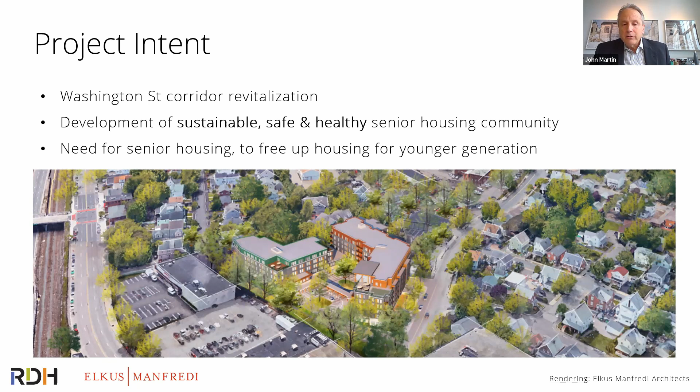And the emphasis from the very outset, from the programming of the building to the food that's served in the dining rooms, to the way the building is constructed is to really place an emphasis on doing a sustainable, a safe, and healthy project to extend the lives and the quality of life for the people who live here and give them the best possible outcome. And as the bullet point notes, to free up housing, single-family homes in Newton and the surrounding communities for younger generations with families. So in that sense, Passive House worked right in.

Specifically, the program is a 6-story building. It's 2 wings, as you saw. The hockey-shaped wing, that I said that for your benefit, Maureen. The hockey stick-shaped wing is the independent living, and the bottom left wing is assisted living and memory care. There is a single level of underground parking that takes up pretty much the entire footprint of the site, and altogether it's about 224,000 square feet.

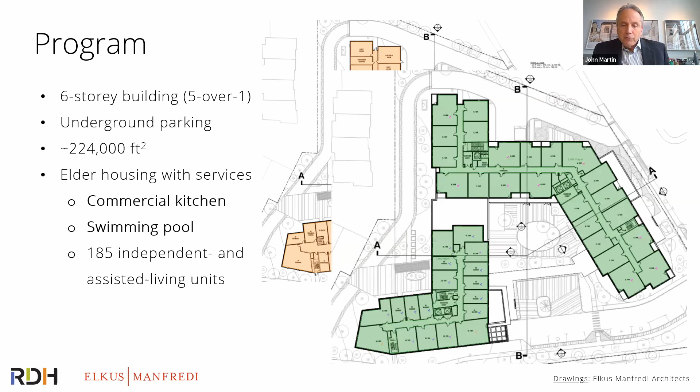This is the upper floor plans. You see where the 2 wings, they're joined on the first floor, but they separate themselves on the second floor. Again, the upper right is all of the independent living apartments, ranging from small 1-bedrooms to even a couple of large 3-bedrooms. And then the wing down to the left is the smaller assisted living units and memory care units on the second floor. Altogether, 185 residences around this central court.

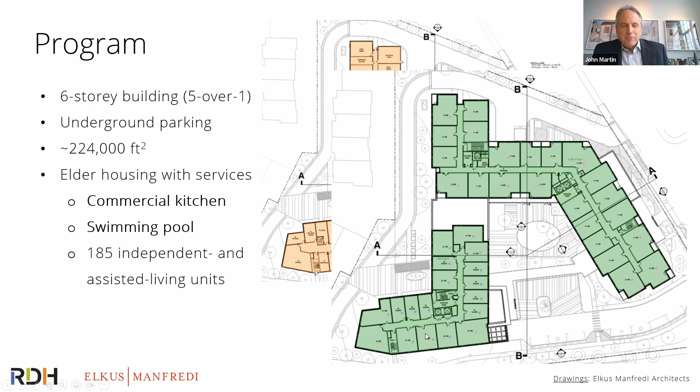Yes, so before diving into the project detail, as Ken mentioned, we're going to touch on quickly what the regulation landscape is in Massachusetts for anybody not quite familiar with it. So in Massachusetts, the energy code is changing really fast. And actually, as of January 1st of this year, this energy code has been updated.

You have a base one, which is very barely used. As you can see, the stretch code is where most municipalities are sitting. And then with that code update, you now have the specialized opt-in stretch code. What does that mean? It means that you have 2 different paths of compliance depending on the path the municipality is choosing for you. As you can see, the vast majority of municipalities are still with the stretch code,

and the first thing to flag is that we are moving to absolute metrics. You can see that they are setting for us thermal energy demand intensities, what we call the TEDI, that space heating demand that we keep talking about. And also that they are significantly tightening, because some of these targets are actually tighter than Passive House. And we already know Passive House is already quite stringent as a starting point. This is to the left.

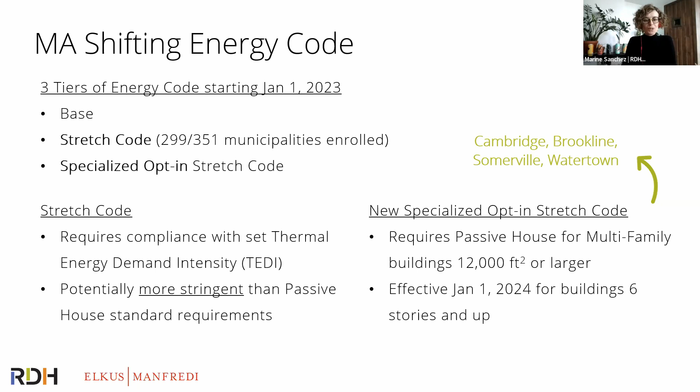What does that specialized opt-in stretch code mean? Again, just to give you a little visual before zooming back onto the project. What you're seeing on the screen is to the left, the residential portion, in blue, the commercial portion. And what you're seeing is that as soon as you're with multifamily residential, left side of the screen, Passive House will be a compliance path no matter what characteristics your building has, right?

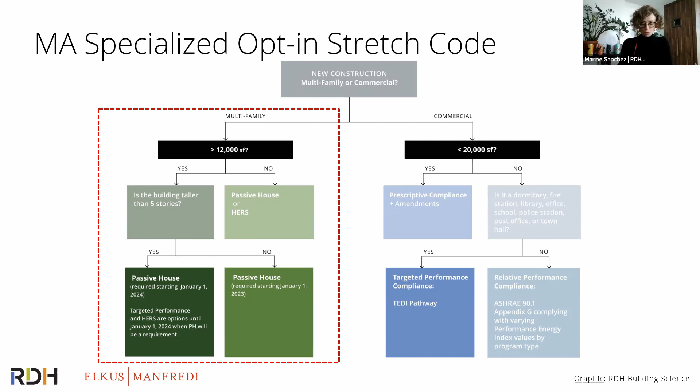And one more thing for the town of Newton, where this project is based, where at the moment every single commercial new build has to be all electric. That is because of their sustainability ordinance, but that requirement might be extended to all new construction as well as major renovations once that electrification home rule passes. Newton is pushing to be part of the 10 municipalities that are undergoing that pilot project, so you can see the path in which we're going. It's getting extremely clear, and it's moving extremely fast.

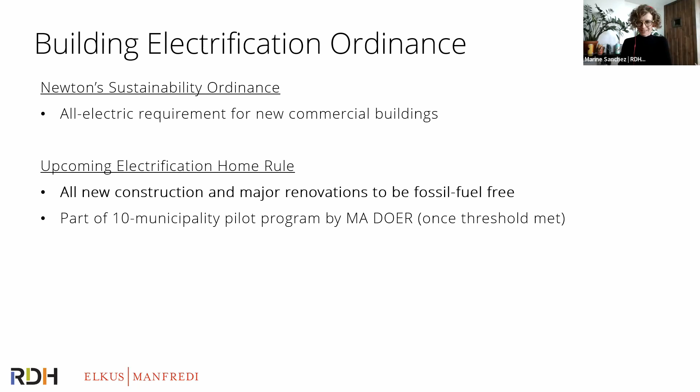So going back to the baseline for a second and looking at our exact project. With these changing and tightening requirements, our baseline is not the one we're used to having. So we're going to look at that over the next section. What we were used to having was that type of multifamily residential project, in which the domestic hot water is typically based on gas, right? And that is a typology that we will be working with on this project, but we are adding additional challenging typologies, and that's going to skew a little bit our project performance.

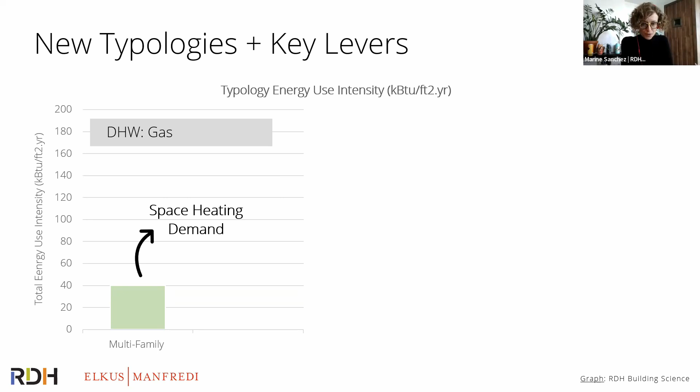So what am I talking about? Yes, we still have the residential portion, but we are adding 3 additional components, and you're going to see that the color coding that we have for the presentation is maintained, to help you visually with the different zones that we're working with.

We have that level 1 non-residential podium, we do have the kitchen, and we have the pool. So we are working with high energy consumers in these 2 typologies, which are increasing the EUI, the energy use intensity, which is the total amount of energy consumption the building is using. So we're adding these different and more challenging typologies, while also shifting the domestic hot water from gas to electricity based. So this is changing quite a lot of things.

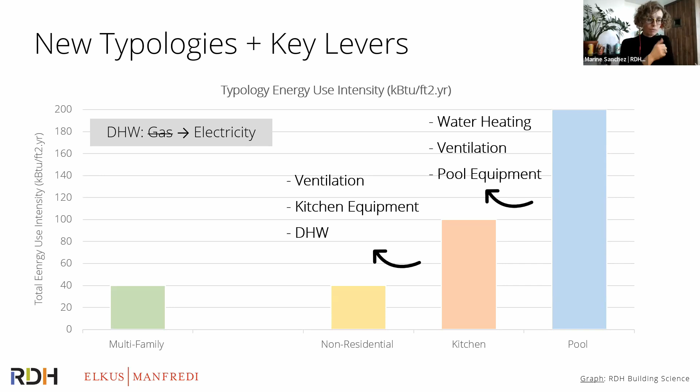So for us to understand better, like you can see on the graph, we've highlighted the key levers for each typology, but for us to be able to make decisions before schematic design, right? Because I'm sharing with you some of the work that has been done during the concept phase. We've decided to use a technical comparison table as our tool for decision making, to understand if we were going to follow these targets, and if so, what it meant.

So this is the quick overview of the 3 typologies in terms of, to the left, sorry, I've lost my mouse, bear with me. Here we go. To the left, what the all electric baseline now means, and to the right, what does it mean to increase our performance all the way to passive house standard. And what you can see is, yes, there are a few differences. You don't have to read through everything. We've highlighted them for you.

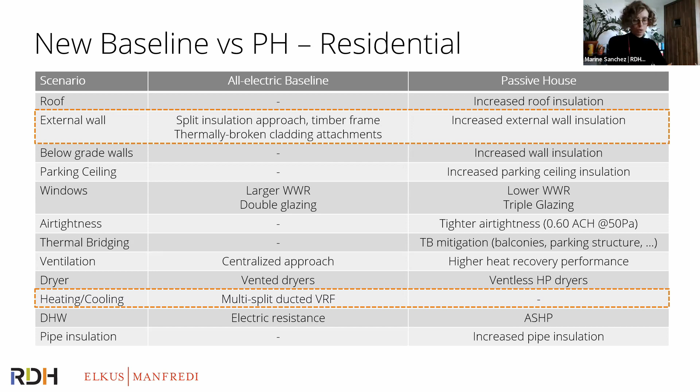The first thing I want to highlight is in orange, this is what, funnily enough, we realized there wasn't such a big difference in specification. So if I go down to heating and cooling, you can see that the system stays identical. We might even work with a smaller system, so potentially slightly cheaper. And in terms of what is required on particularly your external walls, yes, we do have a little bit of additional insulation, but as the code requires a continuous layer of insulation, we're not fundamentally changing our approach. So this is a positive note to see that these upgrades were not significant in the grand scheme of things.

However, the significant ones are highlighted in red, and clearly we're looking at refined window to wall ratio, improved window frame and glazing performance. John will touch on that a little bit later, and a big shift on the domestic hot water side, which is a change in design strategy, shifting from an electric resistance, so direct electric for domestic hot water, to an air source heat pump approach.

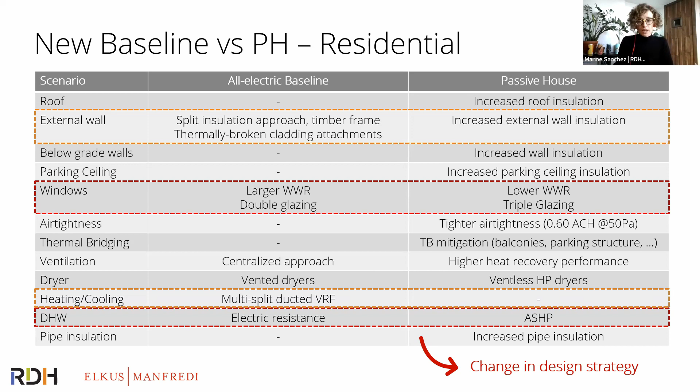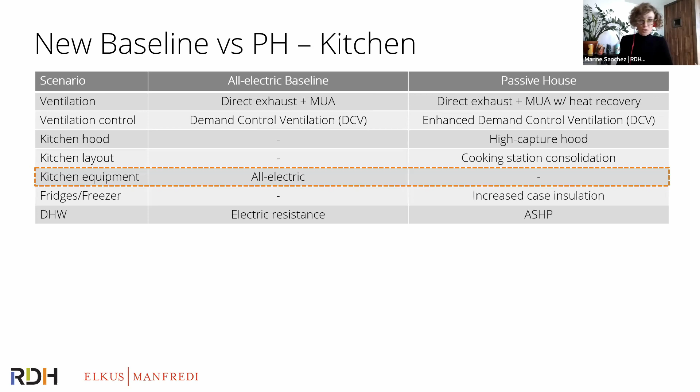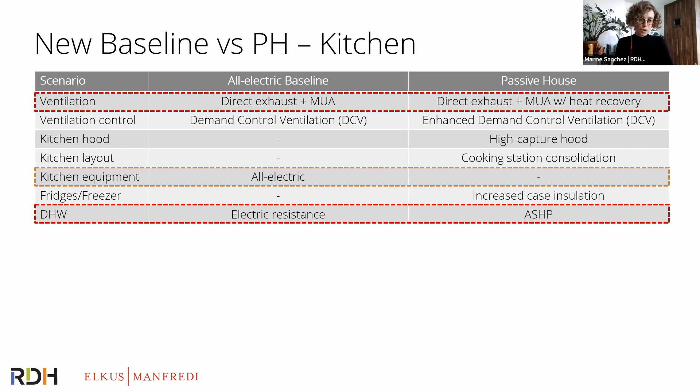We've done a similar approach for the kitchen to again understand what we were facing. And yes, there are a few changes. Worth noting that the kitchen equipment is normally a big change from what we're used to doing, but now that we have an all-electric baseline, you can see that there's no significant changes in equipment anymore from our baseline to the passive house case. However, we do have a few key items, mainly looking at heat recovery into the ventilation portion of the kitchen, as well as that domestic hot water production. You're starting to see the theme there.

Finally, for the pool, same thing again. We've looked at that difference between what we consider an all-electric baseline to what passive house would ask us to do. And again, the key design decisions that we had to make really early are mainly around the ventilation approach, which is a little bit more delicate with the passive house approach, similar to the kitchen, as well as the domestic hot water. So again, you can see that common theme shared across all the zones.

So this was more or less a high-level summary that we had to do before even getting any energy models, let alone detailed drawings, to guide the client into their decision making, right? What are the targets that we're aiming to have and trying to maintain for the project? And what does that mean for our design? And what does that mean for our cost?

With that in mind, and with these tools at their disposal, they were able to do a little bit more work, which we'll share in the last section around the business case. But in the next two sections, John and I will go through the next step of the design regarding the schematic design and the progress that we've made, and the integrated approach that we have had to use to really deliver that high level of performance on that project.

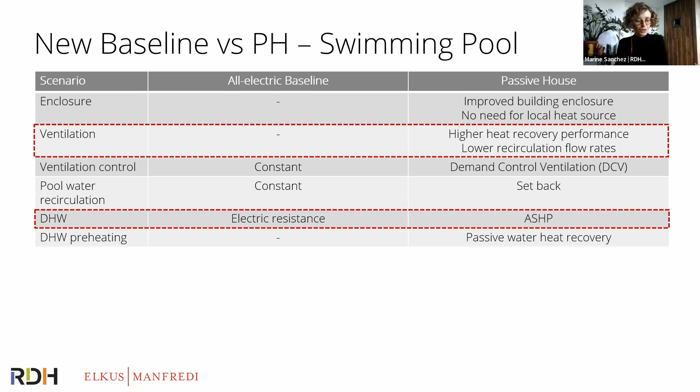So John, back to you with the enclosure. Yeah, thank you, Marine. And I'm seeing questions come in the chat. I know we'll have opportunity later, but one caught my eye, and that was, who was the developer? We're working with Mark Development here in Newton, and what was their motivation for doing this? They do clearly see it as they want to be market leaders. And so they do clearly see offering a passive house certified project as a marketing kind of strategy.

But I think what really drove them was just a social consciousness. The same thing that drives most of us is to try to be good stewards of the environment. So I wanted to put that in there for them, as well as a very enlightened developer that we're working with here.

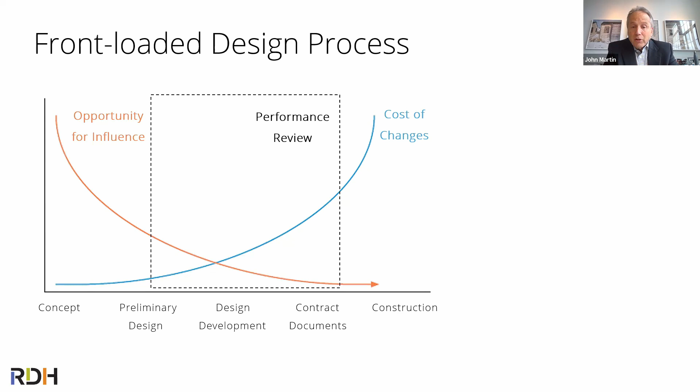So in terms of the enclosure, we'll show you a quick graph that you all know very well, which is the opportunity to influence this design is the greatest at the very beginning. And usually in our profession of architecture and engineering, the performance review has come sometime in design development or even construction documents. By really committing to passive house from the start of this, we're able to now shift all of these reviews and make these decisions much earlier in the design cycle. So if you go to the next slide, I think this little square moves over to the left.

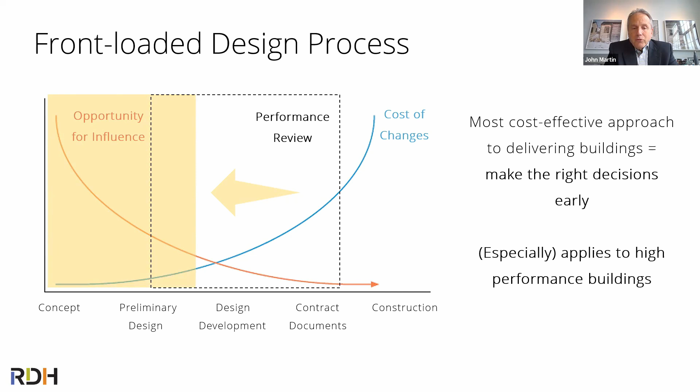And so right now, we're going to talk about cost in a moment, but we just got our schematic design price estimate in, and we have been able to develop a lot more specific case scenarios for the building enclosure than a cost estimator would usually see at this very early stage, which is going to help us at the end to really make the most of our building envelope. So let's go forward, Marine.

In terms of the building enclosure itself, the first step is just to determine the boundary. And clearly this would have been a much easier lift had we just said we're going to concentrate on floors 2 through 6 and only the residential. But here, largely because of Green Newton, the organization in Newton that advocates for highly sustainable design, and the developer's commitment, we are doing the whole building, and that made it a lot more complex.

We've worked hard to eliminate thermal bridging in the structure, and we've worked hard to eliminate thermal bridging in the fenestration. Marine already alluded to the window wall ratio. I'll say a little bit more about that later. And then to just develop clear field effective R values for use in the energy models. If you go to the next,

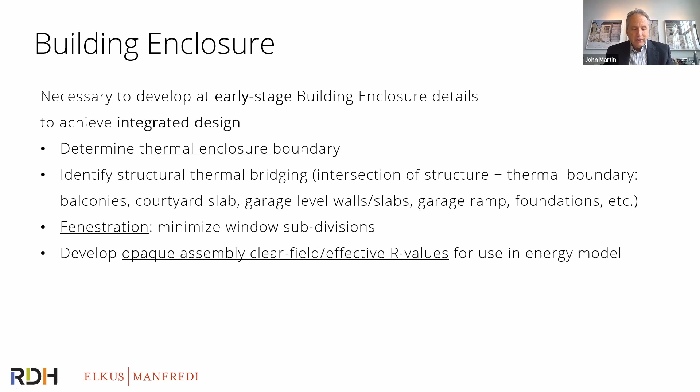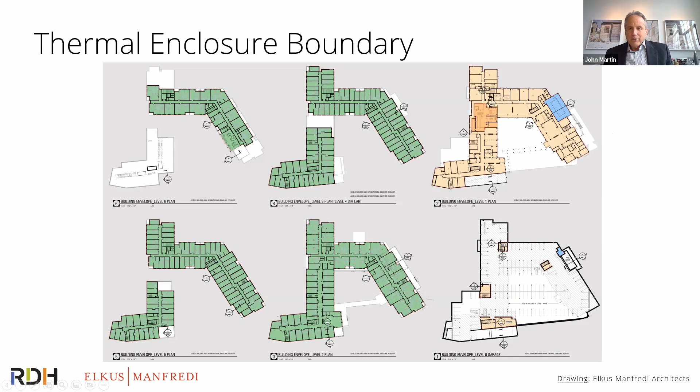We did not let passive house considerations drive the form or materials of the design. We approached this design much as we would any other project, letting the program and the functional relationships and the quality of the spaces inside determine the massing of the building. And it created some interesting things.

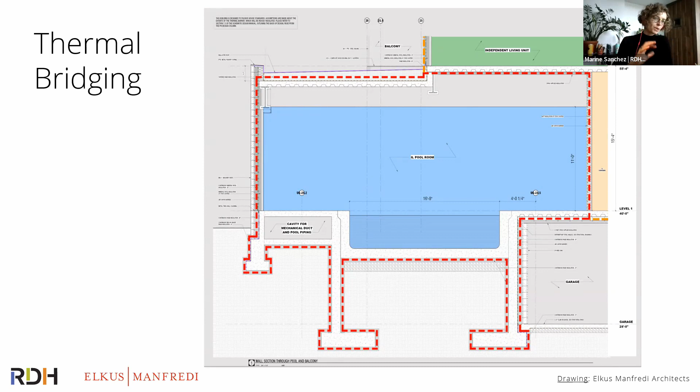You can see that both the orange and red lines define our thermal enclosure, which John just talked about, but I just want to take a second to highlight that the red line, which is around the pool, is also needed from a thermal standpoint, as well as controlling relative humidity levels. It's important to note that even if the pool is within the thermal enclosure, we have different temperature set points, much higher than the rest of the building. So we're going to have heat losses to the rest of the building, as well as higher RH. So it almost requires its own zone subdivision, hence that red line on the drawing.

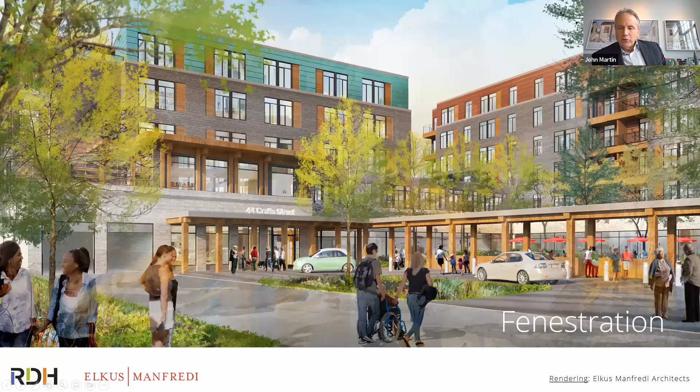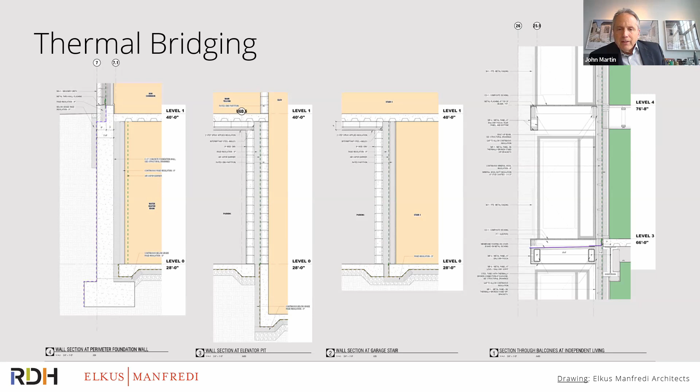If you go to the next, yes, go ahead. Sorry, John. Final thing, I was just going to say, just a quick shout out to the delightful drawings from Elkus Manfredi here. I don't know if you can see, but all the orange to the left are heated space, be it at level 1 or the parkade, and the gray is the parking garage. And you can see, it's quite small, we haven't highlighted it, but you see a continuous layer of insulation wrapping underneath the footing to go back up. So just, you know, music to my ears. I just wanted to point it out because we don't always get it.

So Marine says it's music to her ears. Actually, she made us do it. So true. But you're not supposed to say that, John.

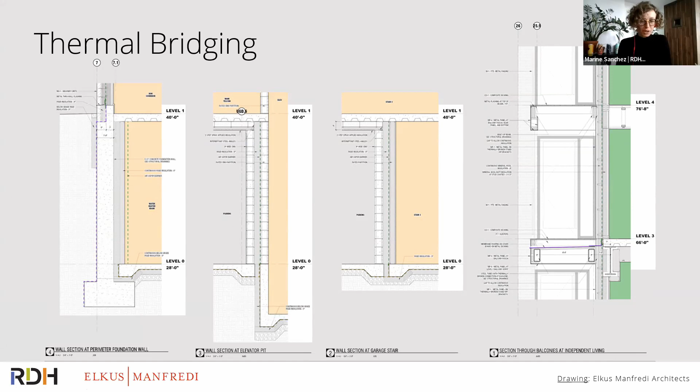It really has been a collaborative partnership, and it's been a great back and forth between our two firms. Just a quick word about fenestration. When Marine starts talking about reducing the window wall ratio, that's profanity to us. I'm showing you the entry to the assisted living and the memory care on second floor, assisted living on third, which are typically very small units, almost like student housing type units. And it's our belief that the smaller the unit, the bigger the window needs to be, to let in daylight, to create views.

And so we have worked hard to minimize the divisions of the glass, since the mullion is the point that creates the thermal bridge. We're using, as Marine talked about, triple glazed windows. We're specifying at this initial stage an Intus fiberglass type product. And so we're really working hard with the technical specifications of the window so we can keep that window wall ratio as big as possible to let in the most light and make these great apartments. But it is something we're focused on. And with that, I'll hand it back to Marine, oh, I got one more slide. I skipped it, sorry.

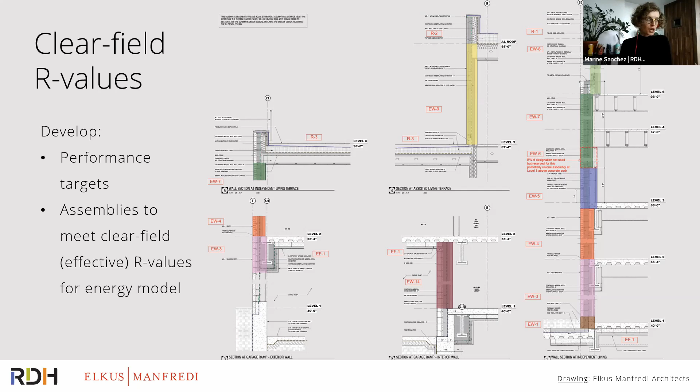Hence all the colorful drawings and notes shared everywhere. Okay, so thank you, John, for that. That was that overview on building enclosure, which definitely had a fair part of that collaboration during schematic design. However, the HVAC side was also fairly demanding.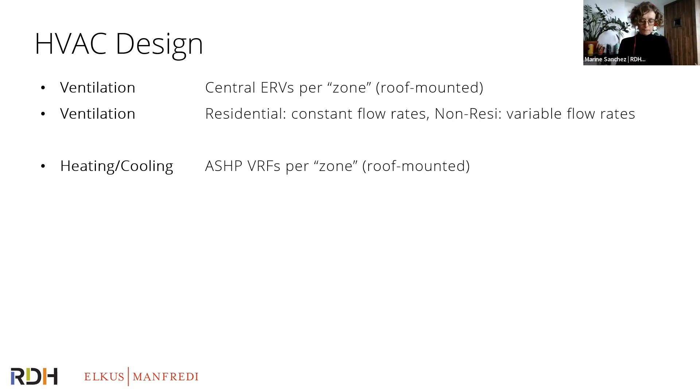However, on the level 1 non-residential portion, we are definitely working with variable flow rates to work more within demand control ventilation rather than ventilating to the maximum all the time. This is very common with passive house designs. Heating and cooling, again, nothing too unusual. We're working with an air source heat pump VRF system, working vertically and distributed per zone for added flexibility, roof mounted.

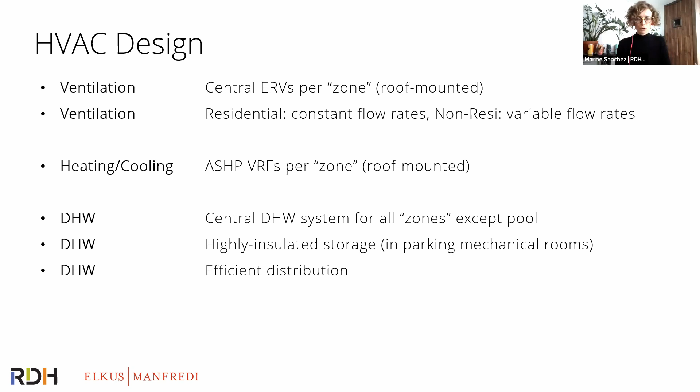And for the domestic hot water, we are working with a central system to be able to do as much heat recovery as we can, finding the efficiencies for everything except for the pool, which is a little bit particular. And of course, we're working with good levels of insulation both on the storage tanks as well as the distribution system. So this is something that should be familiar to people working with high performance buildings.

First of all, Massachusetts is moving towards the International Mechanical Code 2021 starting this July. Knowing that we're going for building permit after that, we have to already design with these higher ventilation flow rates. So where before we needed only this much ventilation per room, today we need a little bit more to follow this code, likely some impact of COVID in there. But that gets combined with yet higher flow rate requirements for the memory care.

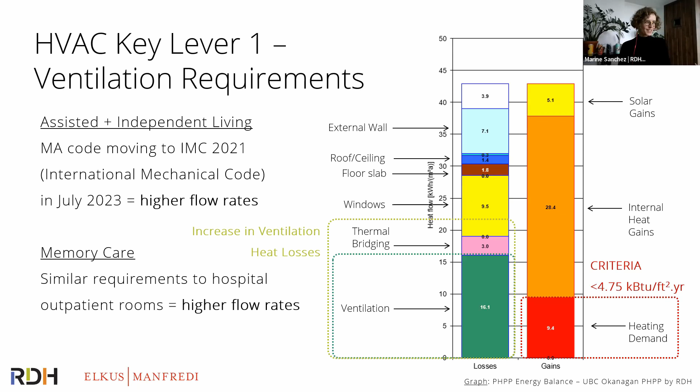So that will be a fun one. We're working through the modeling exercise as we speak. The second one, you've already understood what we're going to talk about. It's that domestic hot water and how are we creating it.

Our third option, you're staying all electric, but you are significantly improving your building and your domestic hot water production through the use of air source heat pumps, where yes, the price per kilowatt is the same, but because you are benefiting from a COP between 2 and 3 on that air source heat pump domestic hot water, you are having a much lower total energy consumption.

And the truth is that this is what we're facing. So option one is now taken away from us because of that all electric requirement, and that's the way regulations are moving throughout the country. The new baseline has extremely high operational cost because of that switch to all electric.

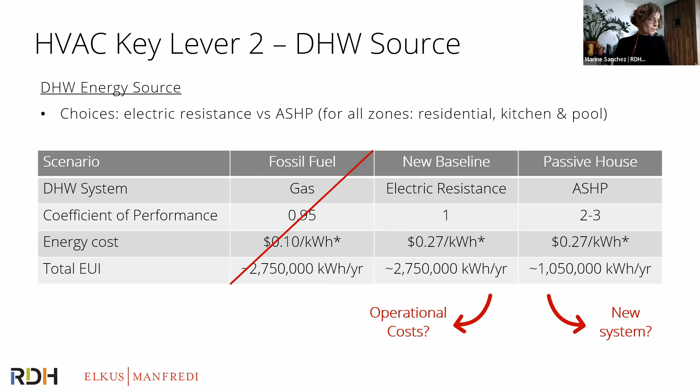And on the other side, you have a much cheaper process to operate, but you have, of course, a cost premium to go with the heat pump approach, but also you need more comfort on the design and the maintenance, knowing this is a type of system that has been used in some passive house, but is not the norm everywhere. So with that, John, I'm going to pass it back to you to bring us home with that business case.

Yes, and there is a business case for this. And so moving forward to the next slide, Marine. Basically, you can see we've broken it out by component here, but not inconsistent with probably some literature that you guys have all seen for mid-rise multifamily housing, we're seeing a premium of about 5.9% of first cost. A better building costs more money, but it is a much better building. It ends up being about a $5 million premium on what was projected to be a $92 million project.

As I mentioned, we've just gotten in our initial construction estimate at schematic design. Suffice it to say, in these inflationary times, it's a little bit over that target of 92 million. And so we are value engineering the building. We're trying to find ways we can save money, but the owner, the developer, has never questioned the commitment to passive house. So if you go to the next slide.

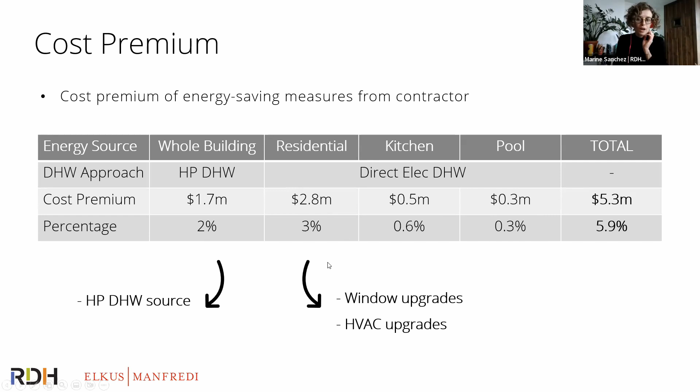Sorry, John, just before you do that, I find it interesting to split it out as well in terms of the cost. The 5-6% is something you've seen, but if you look at the residential only, we're looking at 3%. You're looking at about 1% for the challenging typologies. They do ask for more, but they're smaller floor areas and smaller price impact, and then the 2% on the heat pump approach. So it was very interesting to split that a little bit more to see that if you're working with a kind of typical residential, you don't have to see the 5-6% increase, right?

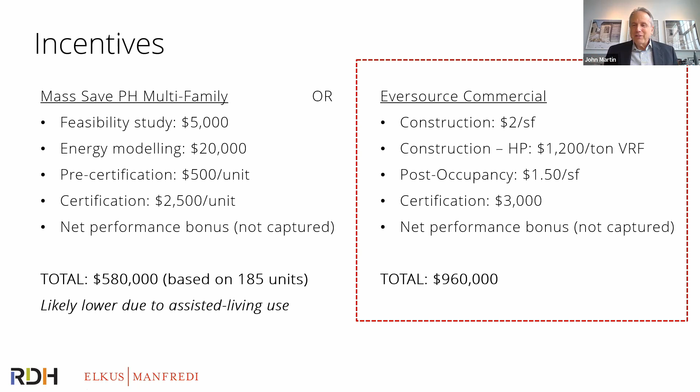Right, that's correct. Fortunately, there are incentives, and we had two paths in Massachusetts. There's a Mass Save passive house multifamily incentive, or an incentive directly from the energy provider Eversource. And so we chose the second path because it yields more of an incentive. Anything you wanted to say about this, Marine? No, we've broken down how all these fees and incentives come together.

But what I want to highlight is that the Mass Save incentive approach is incredibly generous compared to what I've seen. So again, just please use it, okay? Because this is good buildings, but what you can see through that is almost a $1 million approach to deliver a better building is covering more than half of that air source heat pump approach for domestic hot water, which was the big unknown on that project, right?

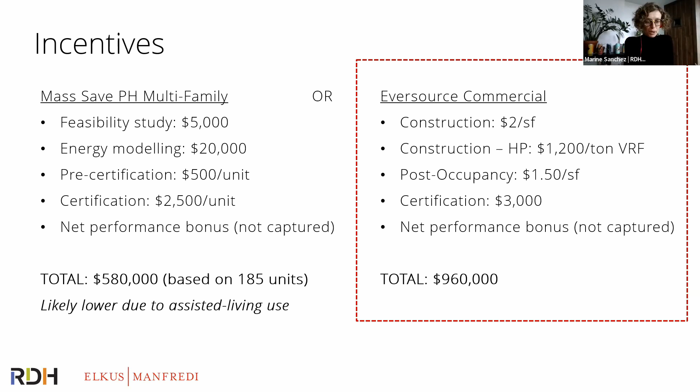The rest of the cost increase, John, correct me if I'm wrong, but the developer said it was a given no matter what to deliver a bigger building. So the main cost premium, which has more uncertainties around that heat pump, was around 1.7 million, and that $960,000 goes a long way to helping us move that way. Absolutely.

Okay, and then a couple of graphs on operational energy and operational costs, because that is part of the business case. What you're seeing in front of you are, for each color, the amount of energy we're using, and in hatched gray, the savings that we're getting. And what is worth pointing out is on the right, you're seeing the floor distribution. So you can see the residential dominates the amount of floor area we have by more than 80%.

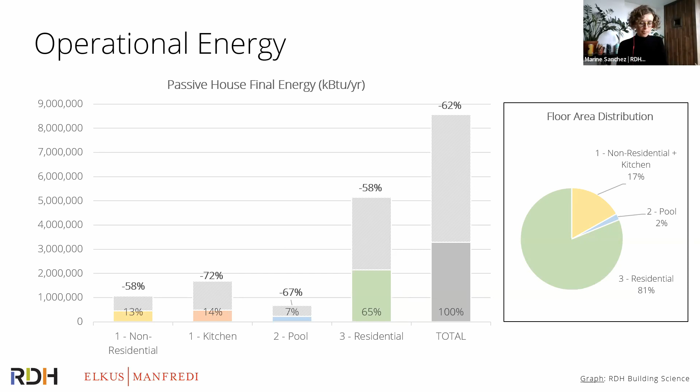However, even if the kitchen and the pool are technically small in terms of square meter, they're skewing the results because they are high energy use areas, okay? And because we're all electric, you can see that the graph has an identical look when we translate that to dollars. And again, you can see the cost in color and the savings at the top combined together in the total gray bar.

What I want to flag on that is, yes, the owner-operator model is quite helpful because none of the savings are going back to the tenant, right? The owner-operator is capturing everything, which helps. And also, I mentioned that before, these calculations are dating from this summer before we started to see cost increases. So we think that this is already quite on the conservative side, knowing that utility cost keeps climbing up.

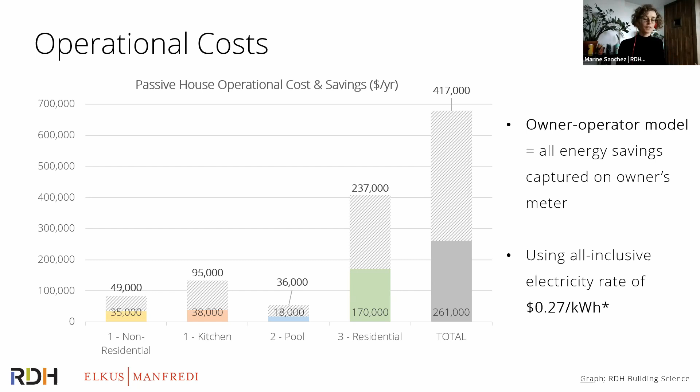So the business case comes out that without any incentive, it's a 13-year return on investment. With the incentives, it comes down to 10 years. That assumes a static energy price, which I'm not sure anybody on this call believes is going to happen. And it also excludes any future risk for greenhouse gas emission penalties, as Boston and a lot of other large cities and even Newton are considering going to with an energy reporting disclosure ordinance. So you do kind of future-proof it by doing this. And on to the next, Marine.

That future-proofing is just part of the hard to make tangible, or intangible, added value. We protect against the rising energy costs. We create passive survivability in the case of tornadoes, hurricanes, floods. All of those things are very important in a senior housing facility. We provide resiliency against climate change. Our indoor temperatures stay at a much more constant state, regardless of the weather outside.

We improve the indoor air quality by the filtration, mechanical ventilation, and overall comfort of the building by controlling more closely the humidity as well as the temperature. So for our developer, it's a very strong business case. They plan to own and operate this for many years, longer than 10 years. So for them, despite an initial cost premium that's hard to swallow, the benefits and the added value far outweigh it. So Marine, any last comments?

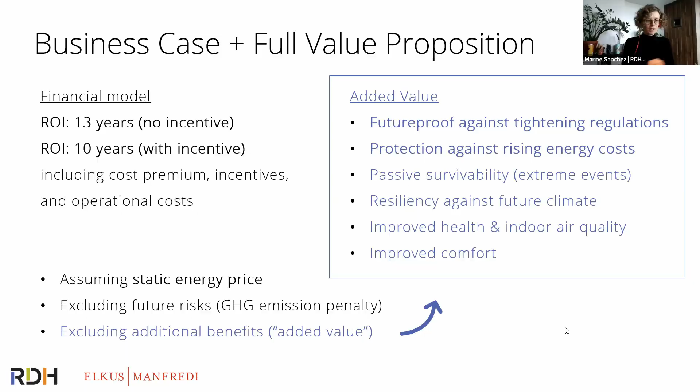Let's go through the key takeaways. So, okay, looking ahead, we have to become very comfortable with what's going to happen. And what we're seeing are tighter targets, need for electrification, as well as rising costs. So with all of that in mind, that changes the baseline we're used to using. So that's something to be very aware of.

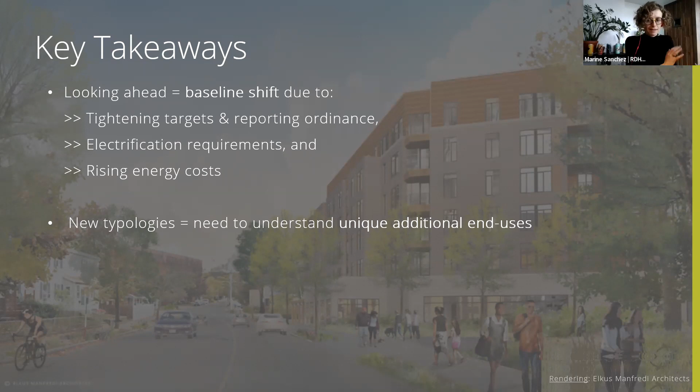Second takeaway, in terms of new typologies, if we are to deliver high performance buildings, there is a clear need to understand the unique additional end use that we have. So that goes for the commercial kitchen, that goes for the pool, really understanding the key levers so that we can design according to that, right? Leaving that for later is not the right recipe.

And finally, I'm sure most of you on the call know it, but just reiterating that you do need that early stage integrated design. Without this, you won't have cost and/or performance optimization. And for us, having that early stage integrated design has allowed us to push key decisions much earlier than what we would normally do, to help a client through that decision-making process and aiming for such high building performance targets.

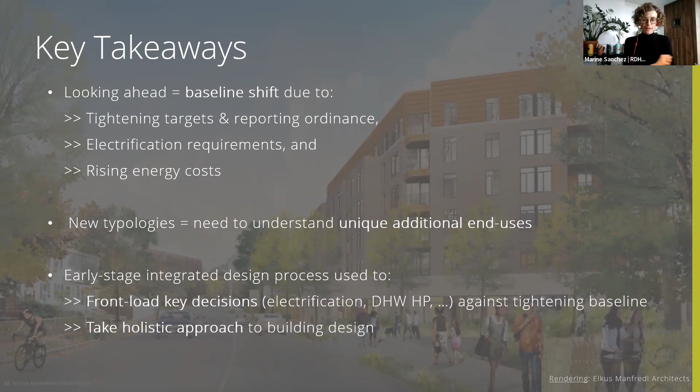And it's also helping us optimize the whole design by really taking a holistic approach. There's no design in silo between enclosure, mechanical, structural. It's all together at the design table, which has already led to a fair amount of optimization. So it's the way we want to see things moving.